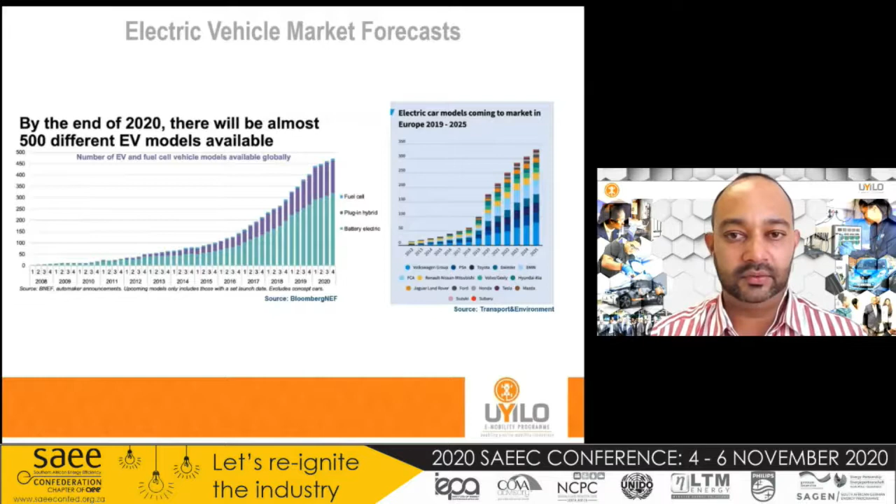What is important to note on the slide as well in terms of technologies, on the left-hand image, is that battery electric vehicles still maintain a larger portion of the market share, with plug-in hybrid vehicles coming into play second, and then a growth of fuel cell electric vehicles in that space. Transportation becoming electric is across all modes of transportation. All modes and options will be fully electric, from personal mobility to passenger mobility to motorsport, commercial vehicle applications, public transport, marine and aviation is moving to electric.

So as we see this moving with efficiencies and technologies, it's quite predominant that transport will become electrified. It'll be connected into the Internet of Everything. It'll be multimodal, bridging different modes of transportation. It'll become shared in terms of the new modes of operation of customers and experience. And the future will be autonomous, where vehicles will aim to drive themselves on different mobility platforms as well.

Now, looking at efficiencies, what's noted on the right-hand side, moving to the left, is that for the traditional conventional vehicle with an internal combustion engine, if we look at the generation of the energy itself and production of the fuel, if that's coupled to renewable energy, the fuel production efficiency is only 44%, and once utilized within the vehicle, it is only 13% efficient at the output of the wheels. Moving into the middle, unpacking hydrogen, the fuel production increases to about 52%. However, utilization in vehicles provides an efficiency of up to 22%, so still not ideal.

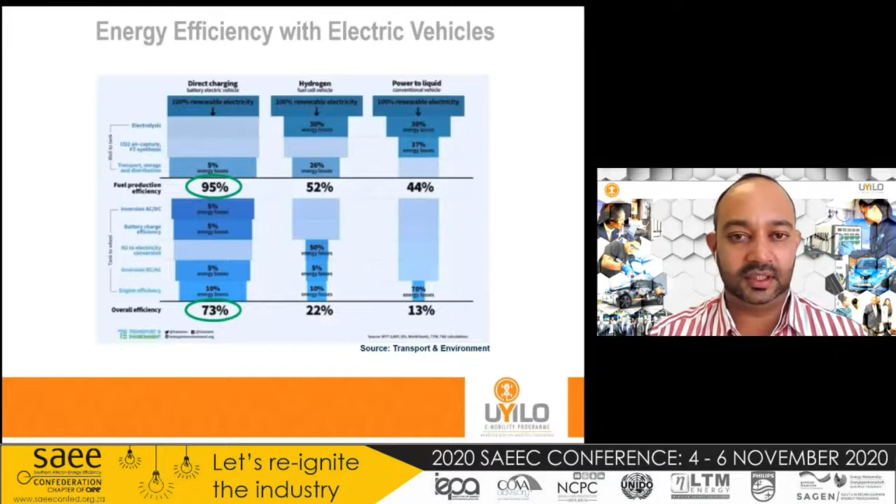So unpacking that further, what electric mobility has also brought about is not only an energy efficient vehicle as a mobility platform, but the whole value chain in terms of production is becoming efficient. They're looking at new material development for the vehicles, being sustainable and efficient, and also the method of producing these vehicles. The factories themselves are moving to renewable energy. The automation within the factories is also moving to smart systems and energy efficient systems, and optimization of efficiency as a whole from a production environment.

So with that, we see merging into Industry 4.0 and the Internet of Things, all in the space of energy efficiency and optimization. So it's not just the product; the whole value chain of production as well as material sourcing is moving to sustainability and energy efficiency. It's also looking at the end of life in terms of vehicle recycling, making sure that materials that go into the vehicles are sustainable and able to be recycled as best as possible.

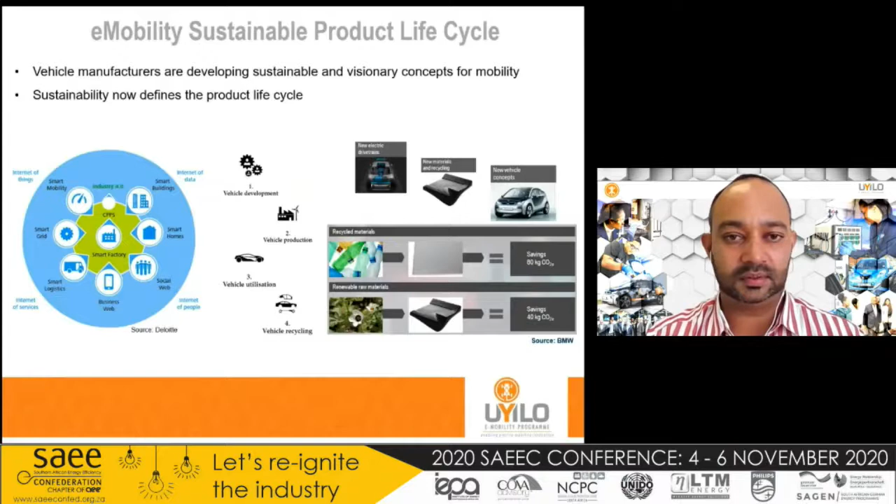So when we look at the life cycle of the vehicle, how efficient are they over the total vehicle life cycle? It's clear here, not only from utilizing the vehicle, but from the efficiencies these bring across. The example here is within the EU. The stats presented show that today's petrol and diesel cars emit almost 3 times more than the average EU electric car, taken in terms of the averages and countries presented there. So electric vehicles not only eradicate tailpipe emissions, but, dependent on specific countries with high renewable energy production, the overall total life cycle emission is a lot less.

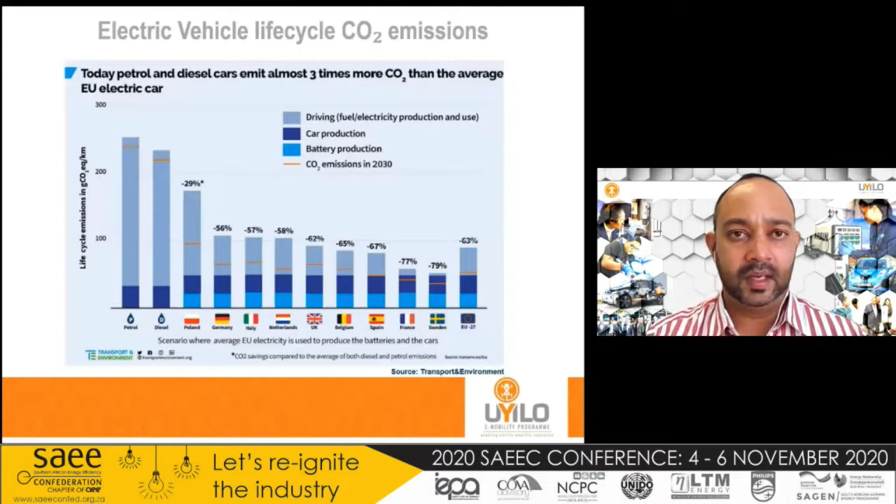From a user perspective, this is a snapshot of the maintenance of a traditional petrol vehicle versus an electric vehicle, both from Nissan. We've spoken about the efficiency of the vehicle, but this is some efficiency in your pocket as well. At the top is a typical maintenance cycle of a petrol vehicle, up to 150,000 kilometers. The R there means replaced, but in the South African context it actually means rands, because every time they replace all of those components, you're going to be billed for that in some format, either in a maintenance contract or built into the price itself.

And with that, we're seeing that on a petrol vehicle, there's quite a bit of maintenance involved over the life cycle of 150,000 kilometers. However, looking at the image at the bottom, we're seeing an electric vehicle is a lot more efficient from a maintenance perspective. The I that is highlighted there is just on inspection.

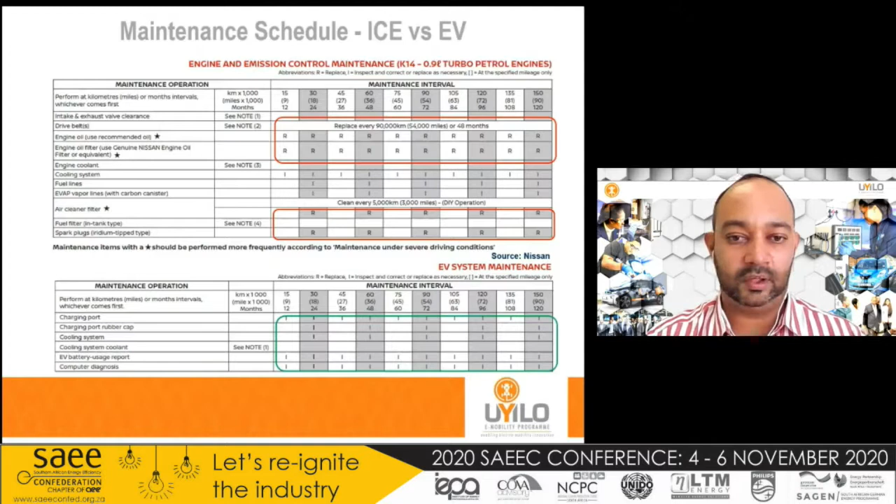So what this is highlighting is that over a usage distance of 150,000 kilometers, an electric vehicle would typically only go in for inspection and not have additional components to replace, thereby also providing efficiency in terms of your pocket on maintaining and utilizing an electric vehicle.

So moving on to the vehicle component itself, what we see is the main component highlighted there on the floor of the vehicle is the battery. That is the key component of the vehicle, where the majority of the technology is coming into play, but also a huge cost of the vehicle itself.

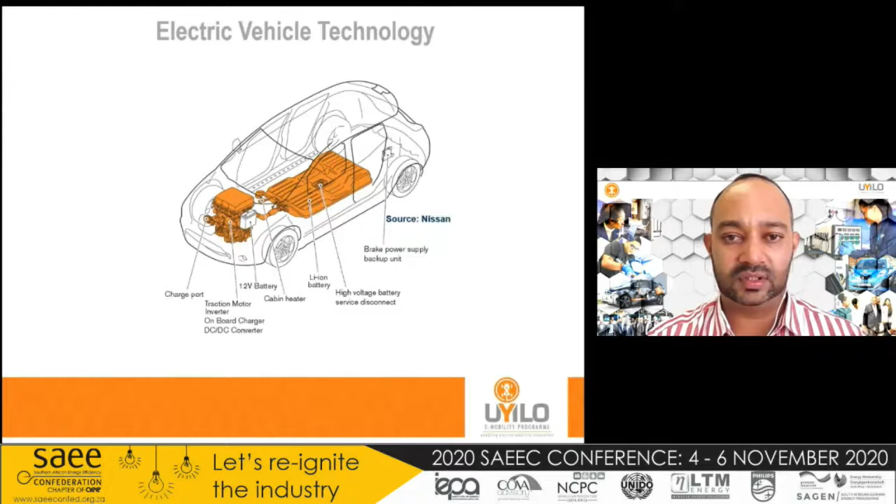Thankfully, the manufacturers offer up to 8 years warranty on the battery, and that gives some consumer protection and confidence in the vehicles themselves. The battery is also the largest component of the electric vehicle drivetrain system, and typically takes up most of the space on the floor of the electric vehicle itself.

Now, moving on to the technology of the battery, and that's what electric vehicles present. Within an electric vehicle, as highlighted earlier, a large component is the battery. Essentially, electric vehicles present a battery on wheels. And in the energy space, we're seeing energy storage play in the mix of renewable energy generation.

The energy demand is not always at the peak of energy production from renewables, and hence batteries or energy storage technologies come into play. So if we latch that onto electric vehicles, what we see is an opportunity to utilize electric vehicles beyond just mobility or transportation, utilizing lithium-ion batteries for grid services, behind-the-meter services, and those opportunities there.

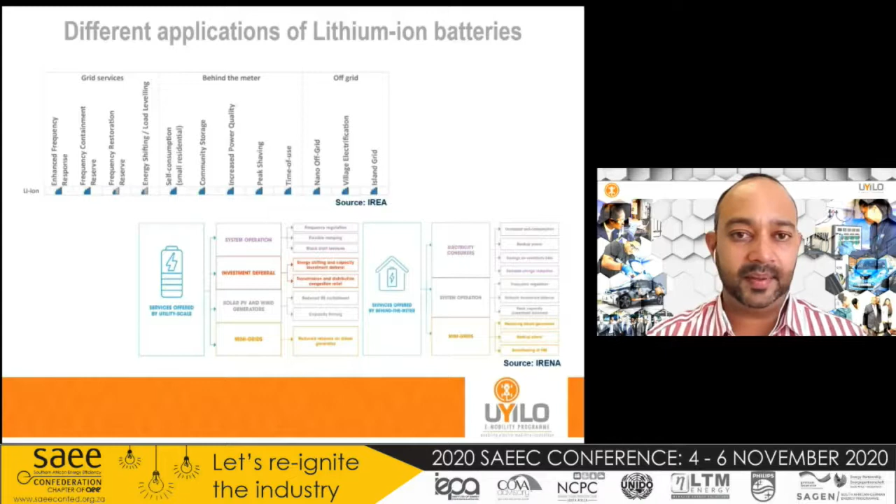So typically what we see in the slide is the landscape of how the energy sector utilizes batteries, specifically lithium-ion batteries. So if we unpack that going forward with the car, as an extension of the energy sector, we see the technology landscape evolving.

From traditional central generation, transmission and distribution, we're seeing an evolution of new technologies coming in, which are bringing efficiencies as well from a generation perspective. What's also key to note in this space is energy storage, playing from bulk generation into transmission, distribution, and end user as well.

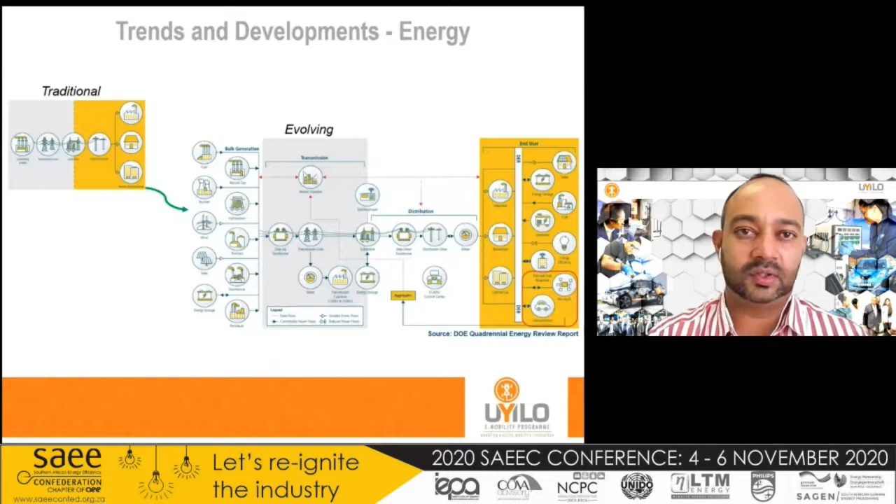And looking at the end user image, what's key to note on the right-hand side at the bottom, microgrids come into play, and also transportation. And on transportation, the image shows a bi-directional arrow, meaning that electric vehicles will not only charge from the grid, but be able to support the grid as well. And this is on the basis of expanding the aspect of the batteries within the vehicle.

So for the supporting infrastructure that allows that to happen, there's a range of different types of charging stations that get utilized at home, at work, and on the road. And what we also see is new technologies of charging stations coming on that have onboard storage.

So basically what it means is that when an electric vehicle is not being utilized on the charging station, the onboard energy storage system in the charger will actually charge up. And when a vehicle comes, it's able to deliver full power with minimal impact on the grid. So we're seeing supporting infrastructure available on public transport. We're seeing vehicle to grid come into play, where vehicles participate within the energy system while they're lying idle.

And what's also important to note in terms of energy efficiency and minimizing the impact on the grid is the implementation of resilient and smart grid infrastructure that supports renewables, supports storage on site, and minimizes the impact on the grid, while also optimizing energy efficiency.

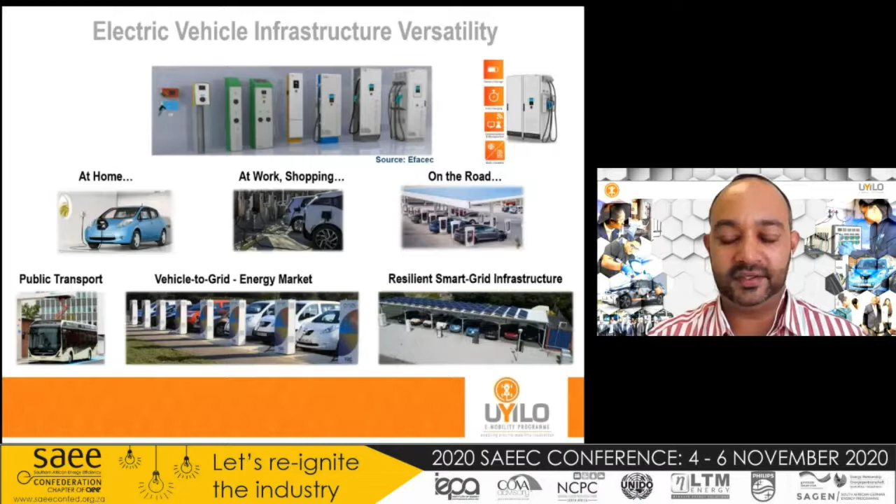And in South Africa's case, while the grid is carbon intensive from predominantly coal, these sorts of concepts provide energy efficiency on the grid edge side in terms of optimization and minimizing grid impact.

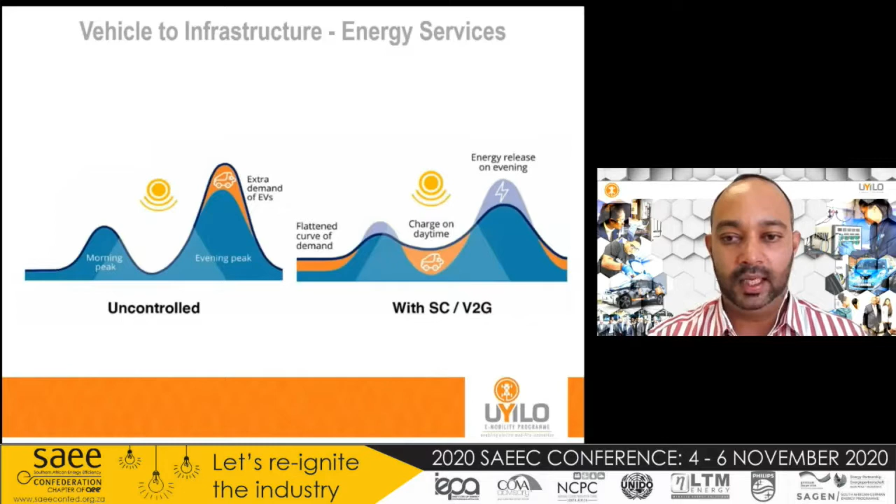So with the full integration of the system into the utilities such as Eskom and the municipalities, where they are generating their own energy, we then see that electric vehicles' demand on charging can actually be controlled and optimized to when there is capacity, and essentially flatten what was called the duck curve into a typical camelback curve, as the impact on the grid network, and also improving energy efficiency overall, optimizing both supply side and demand side management.

So on infrastructure services, what's called vehicle to everything. As mentioned, the electric vehicles have a large battery pack, and through that, utilizing the technology of the vehicle, the hardware of the charging infrastructure, as well as the software as the infrastructure, the vehicles themselves are able to deliver vehicle-to-grid services, typically looking at voltage regulation, frequency regulation, and other services as well.

In the context of energy efficiency, in homes that are energy efficient, typically with rooftop solar, we can then utilize that on energy production, and then on-site energy storage as well. And then also expanding that with electric vehicles that will increase the storage capacity. And typically that will form what's called vehicle to home, and typically behind the meter services, where the electric vehicle will supplement the storage technology and ability to minimize energy production and energy utilization in the home environment.

The technology utilization on V2X, or vehicle to everything, is being expanded into different technologies, not only DC technology, but also AC technology, and a number of manufacturers are also participating in this technology as well. While it was being pioneered by Renault, Nissan, and Mitsubishi, we're certainly seeing new OEMs and vehicle manufacturers coming into play into the technology itself.

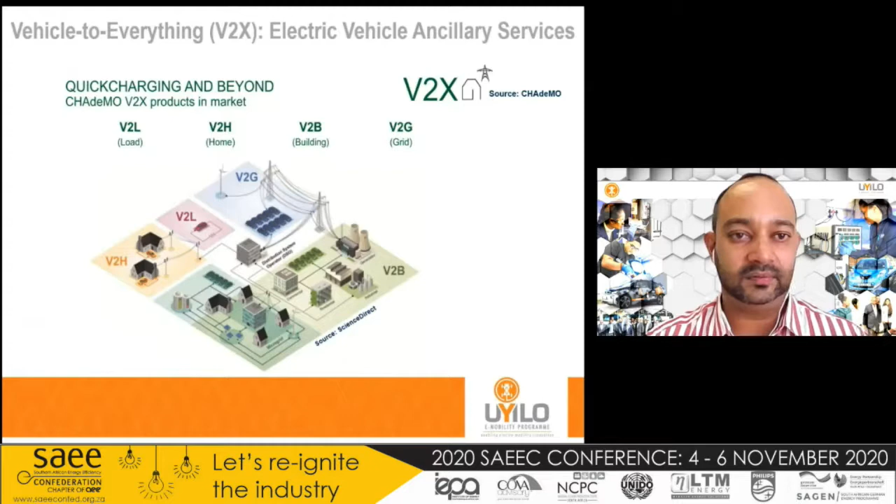And typically vehicle to load, in situations or circumstances where there's full power outages, in disasters or any other situations, the technology of V2L will allow power to be dispatched from the vehicle into a device that can provide typical 220 AC output and power typical loads for any type of emergency relief or support in that regard.

So if you look at vehicle-to projects worldwide, there's certainly a number of emerging and leading projects globally, specifically in the EU, in Europe, where a lot of the technology development and piloting is taking place. That's also led through the charging technology of CHAdeMO, which is on the Asian vehicles, but we're seeing that also come into play now from specific pilot projects from the European Association as well, and supporting technology.

And through that, one of the projects specifically highlighted is the uYilo project on the smart grid ecosystem for electric vehicles. And through that, we see the showcase in South Africa on energy efficiency and optimization, minimizing the grid impact of EV charging, optimizing renewable on-site generation, coupling storage, not only traditional storage but in the context of repurposed electric vehicle batteries onto stationary storage and integration within the circular economy.

And what we see is a large distribution of multiple charger network, AC charge points, DC charge points, the technology of vehicle to grid, as highlighted earlier, being showcased alongside Nissan, and then also energy management, localized energy management, optimizing energy generation, monitoring the grid on what its capacity is, and also optimizing the demand side from the chargers as well.

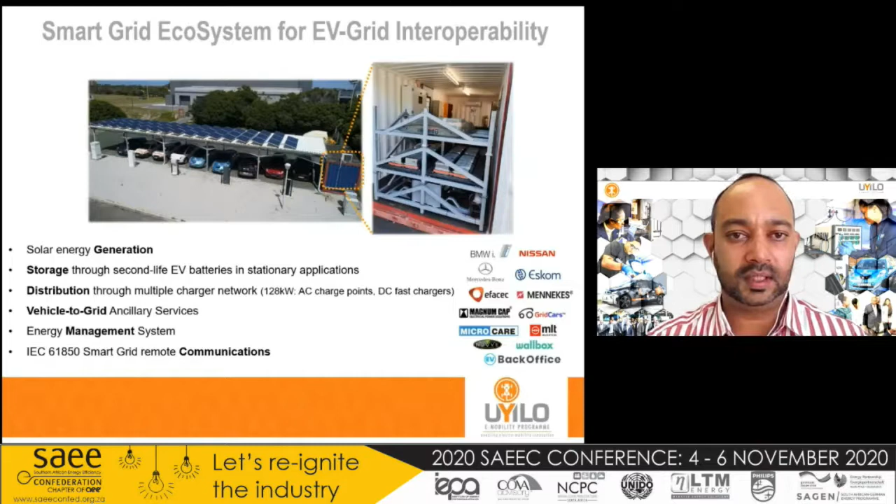And then on the overall smart grid communications, the project has alignment to IEC 61850 for remote smart grid communications of the microgrid itself. So what we see is that there's local demonstration of these technologies in South Africa to advance the rollout and support all role players in the ecosystem as such.

So wrapping up from uYilo's side, as mentioned, the program has been in existence for the last 7 years, alongside a mandate of enabling, facilitating, and mobilizing electric mobility. The program is supported through the Technology Innovation Agency and funded through the agency as well. The activities of the program include government lobbying, industry cohesion, enterprise development, pilot projects, thought leadership, and skills development.

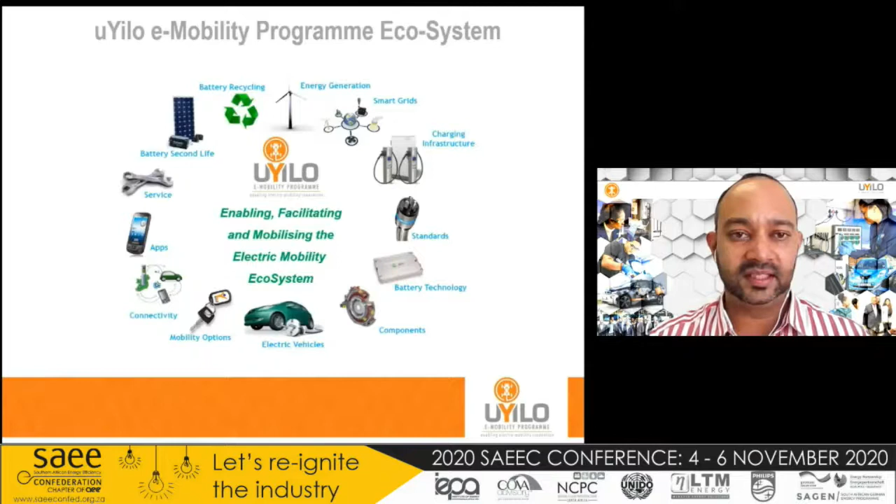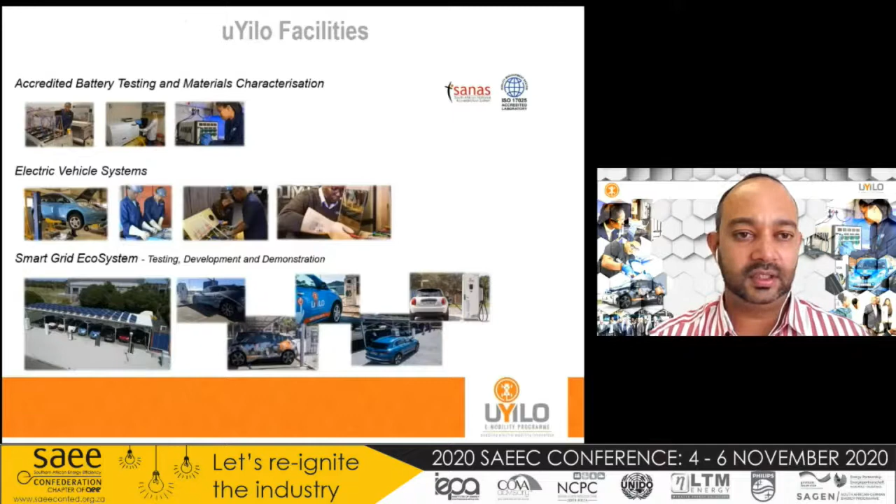The program is supported across the ecosystem of electric mobility as we see that it presents. So it's not only about the vehicles, it's unpacking the whole ecosystem in South Africa, looking at new technology developments, supporting mobility options, skills development, and also unpacking the circular economy, and is supporting facilities as well on enterprise development support, on technologies and emerging participation of the industry as well.

On Kickstart funding, that's what we initiate to advance industries in South Africa to participate in that, and that's an annual funding call that's available to advance technologies across the ecosystem for electric mobility, and also advance South Africa's participation not only in the local economy, but also opportunity in long-term outlook to expand and participate in the global economy and technology that electric vehicles present.

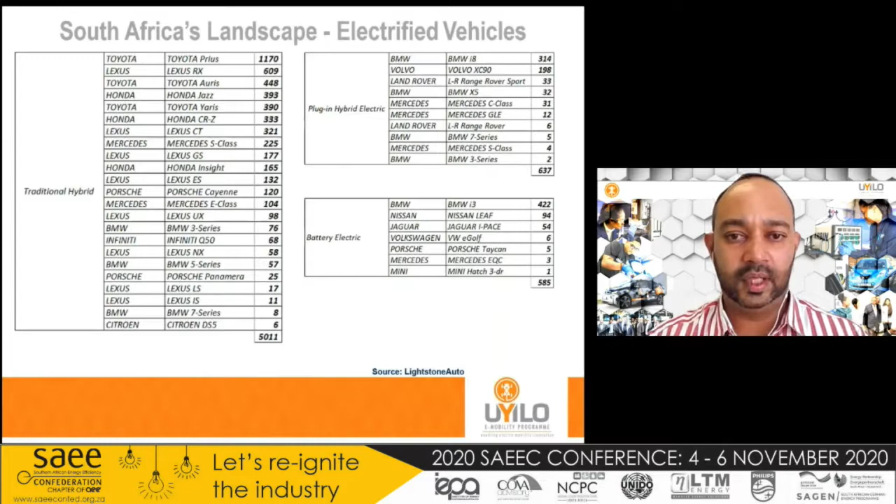So finishing up on South Africa, where are we? So hybrid vehicles were introduced in 2005. So it's still early days for electric mobility, but certainly we see an uptake coming into play, and various lobbying work that is in play to try and assist the uptake from a pricing point of view, from a taxation point of view, and trying to increase the uptake of electric vehicles.

Supporting charging infrastructure is growing radically across the country. A number of role players have been advancing that, and we're seeing that not only within the urban and the city environments, but we're also starting to see the network develop on the highway networks as well. And as alluded in introduction, it's not only your personal mobility. All modes of electric vehicles are being showcased in South Africa in mining, on commercial vehicle applications, electric motorcycles, as well as tourism and utility vehicles.

So we certainly see South Africa is emerging in this space. A lot more commitment and implementation is required, both from government and industry. And we hope that this has certainly brought some insights to the delegates of the conference, and we look forward to further advancements and uptake of the technology itself. So thank you for your attention, and hope that that has brought some insights and opportunity to engage further in the later panel discussion. Thank you.

Okay, sorry guys, this online thing, it's complex, it's not for everyone. So I'd like to apologize for that. I had my mic on mute.

Yeah, so to start again, thank you, Mr. Parmar, for that highly informative presentation, on giving us an update on some of the efficiencies, some of the technology, and the state of where South Africa is sitting or standing in the global context and in the local context when it comes to e-mobility. I think a lot of people have learned a lot from what you presented. For myself, and judging by some of the questions that we are getting in today, a lot of people are really excited about where South Africa sits in the e-mobility and the future and the potential that the future holds.

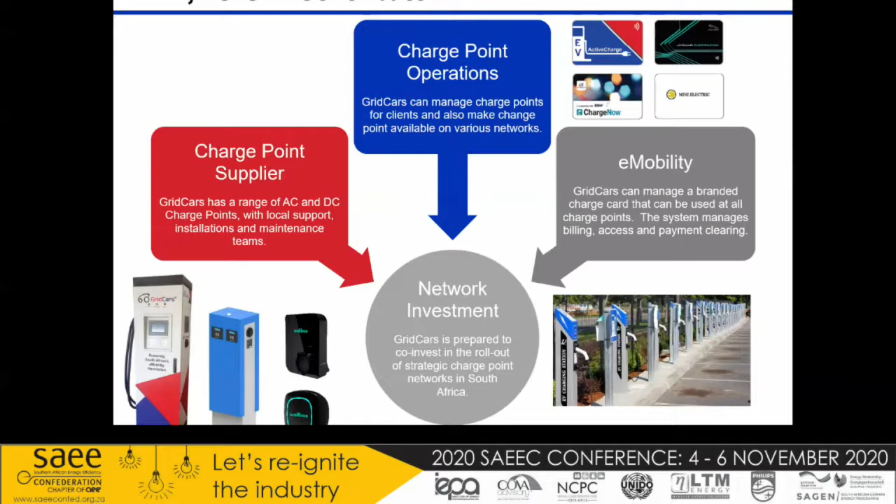So just as a very brief introduction to what GridCars is, we play in 4 functional spaces. So firstly, we're a charge point supplier. So we've got a range of charging stations that we would be able to sell or supply customers. We are an operator, so we manage charging stations on behalf of other customers. And we're an e-mobility provider.

An e-mobility provider means that we're really managing the back end of the charging station. So the back office, the payment systems and the billing systems. And then finally, we also invest in the network and help to grow that network so we can move that across South Africa.

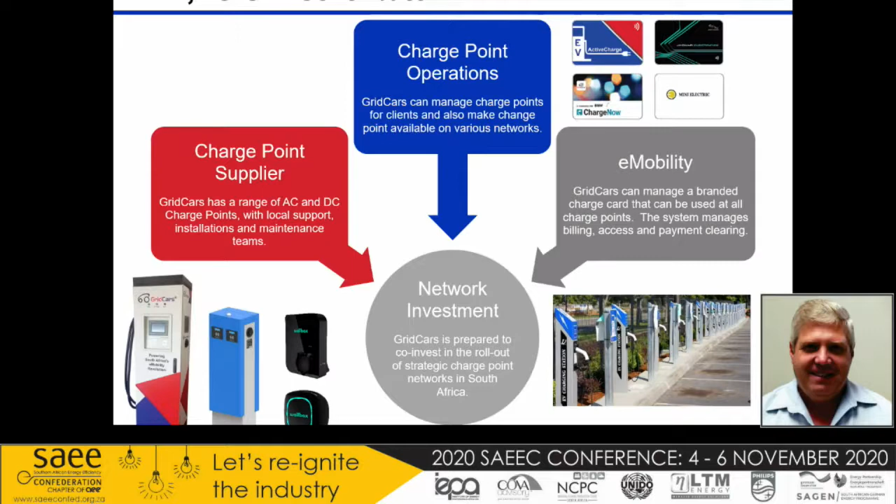Why is the EV market growing? I think Hiten has given us some really great insights into where the market is and to what the world players are, etc. So these 4 major drivers. Firstly, stricter emissions regulations, and I think customer awareness of these regulations and certainly of the emissions side of things. Customer acceptance is really a big one. We're starting to see more and more people realizing where the technology is going and what's going to happen and when, and how quickly it will pivot.

Lowering of battery costs, that's a massive one in the market, and the installation of more charging stations as we expand that network. I think we're seeing the evolution of multiple business models in South Africa. We're seeing large players entering the market, so more and more of the fuel companies are putting strategies on the ground. Most of the OEMs have now got a strategy, if not vehicles in the country. We're seeing early signs of consolidation of technology. We're seeing venture capital and private equity funds starting to underpin the growth. And these are all the signs that you need to see a strong move towards the pivot within this industry.

So there's also strong support from international and to some extent local levels in terms of decarbonisation. We're seeing a drop in price of renewable energy and lowering operational costs of EVs, and specifically international affordability of EVs and the increase in supply. And why do I say specifically international? EVs are still relatively expensive in South Africa, but as the prices drop internationally and as production internationally slows down, there will be a forced move to electric in South Africa, and we will need to manage that transition. So this is the motivation as to why we think it's all going to happen quite quickly.

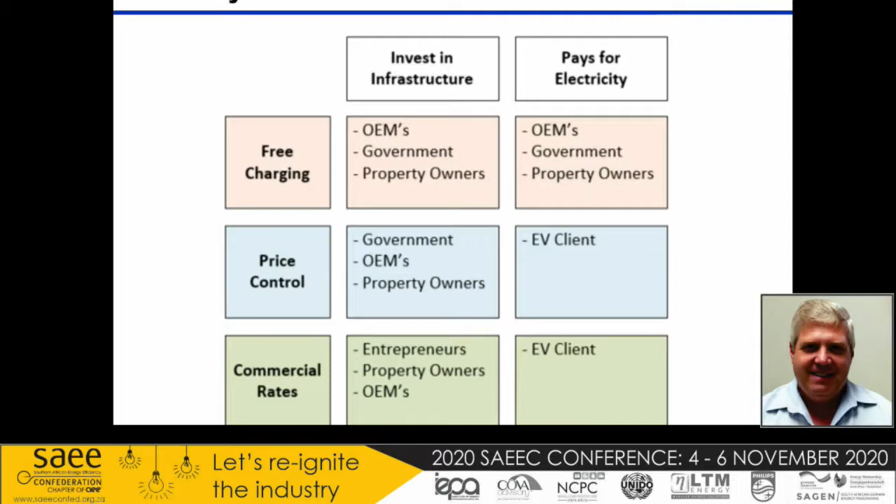So part of the discussions that we've seen happening around various tables is who's going to pay for the infrastructure. So there's 3 ways that ultimately this will play out in South Africa. It's different in other countries. In other countries, we've seen a much stronger role played by government. So if charging was free, the only people who are going to fund that are going to be the OEMs and government themselves. And they'll be paying for everything because there isn't such a thing as free. So if you're driving an electric car, it uses electricity, and somebody's going to have to pay for that electricity. So a free charging strategy would mean the payment must come through the OEMs, the government, and maybe to some extent property owners.

If we look at a price-controlled environment, then again, the infrastructure funding would most likely need to come from government and OEMs, simply because there'd be very limited business cases. There wouldn't be the opportunity for entrepreneurs to enter the space. And certainly price control would mean that the EV customer is paying for the charge.

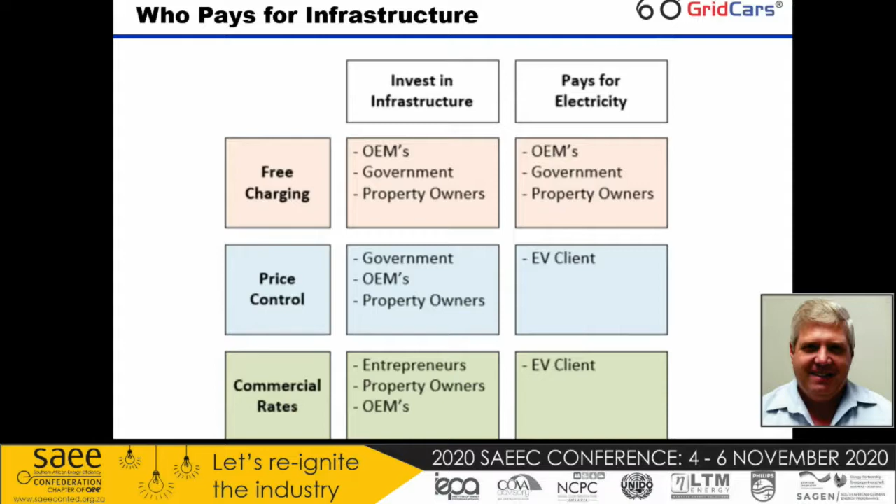Finally, if we allow the industry to be driven by commercial rates, so supply and demand. Basically, as new players enter the market, there'll be a play in terms of price, and we'll see those things changing over time. Certainly there, you're looking at infrastructure funding through entrepreneurship, property owners, OEMs, and various other opportunities and business models that come up. So just to then run into how do these things start coming together?

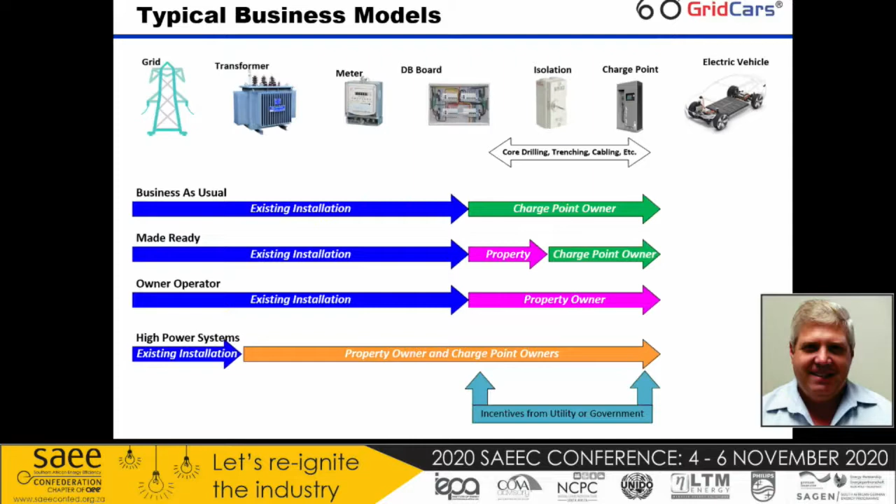When we move to high-power systems, this line starts to move back towards the transformers. And just to give you an idea, if you've got a 200 kilowatt transformer and I want to install a 360 kilowatt charging station, we've got a problem. So we need to then look at upgrading those networks. As we look at constraints within these networks, because this is really where the challenges come in infrastructure.

So the first level of constraint, we typically try and deal with that through what we would call smart charging or load management. Really, it's similar to what Eskom's load shedding is. So we'll share the load between various vehicles or various charging stations, potentially between various properties. And we'll manage that load in a clever way. So if we know certain cars need to be charged quicker, we'll give them some level of priority.

So if we move into the second part of stress management, we start looking at having a battery boost. So battery systems that then boost the charging infrastructure so that we can slowly build up the charge in the batteries and then unload it when we need to actually charge the vehicle.

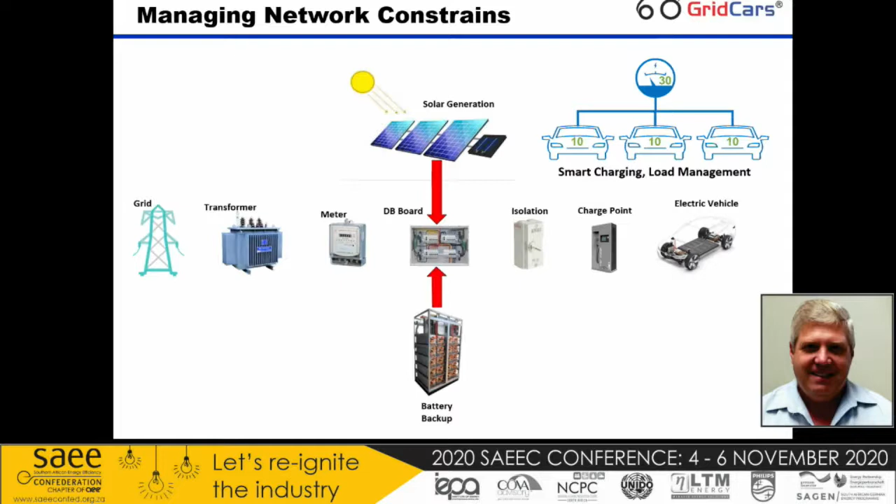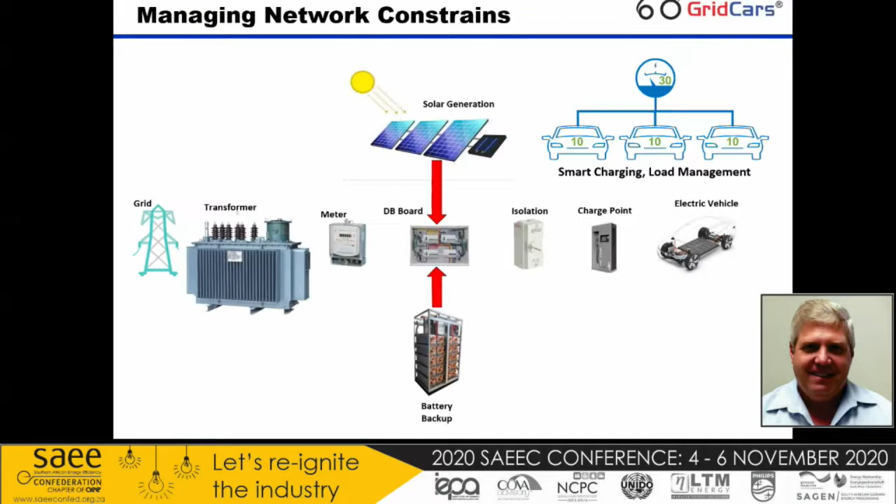The next level is we move the battery system to a battery backup at the site, and we'll probably start looking at introducing things like solar and allowing that site to be a little bit more independent and to be able to expand beyond the normal capabilities of what their site is capable of doing. Beyond that, it's really making transformers bigger. So, we want to try and avoid that because that becomes a very costly exercise.

Another example, we've worked with Clearwater Mall. You can see a small picture in the top right of it, but this just gives you some sort of idea again of how much contribution something like solar could make and how we could utilize that contribution going forward in solar systems and charging systems.

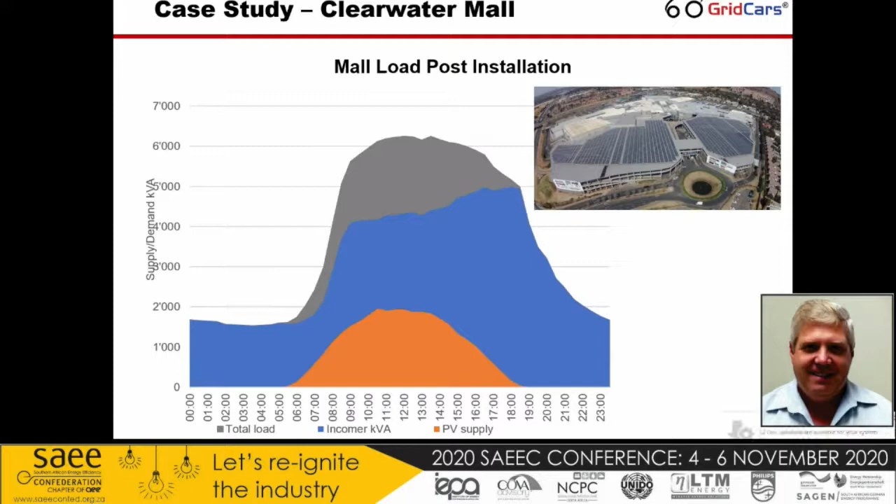Grid Cars was faced with, every single charging station supporting two standards means extra money. And if I look at the network we rolled out, we probably rolled out 5 or 6 extra connections simply because of the fact that we weren't supporting a second plug standard.

So South Africa is lucky in the sense that we are a new car country only. We don't import second-hand vehicles. And because we don't import second-hand vehicles, we don't typically have to deal with legacy things. So Nissan, for example, typically brought out CHAdeMO initially, whereas now they are making it an offer that you could either bring the vehicle as a CCS or CHAdeMO. Clearly, at that point, you need to be buying a new vehicle, not importing second-hand vehicles. So I think as a country, it's really worked for us to stick to one standard, and Grid Cars has supported CCS across the board and across the network.

So just to then take you into what this operating environment looks like that we've already established here in South Africa. And I think it's really important to understand when we talk about infrastructure, yes, there's the energy side of it, there's the charging side of it, but there's a massive big virtual component to it. And Gridcars has partnered with IntDev, Catalytic, and with Internet Solutions to set up a massively redundant system where we have some data center redundancy, we have line redundancy. So it gives us exceptionally high uptimes of any of the equipment that we're running in these networks and able to support that network.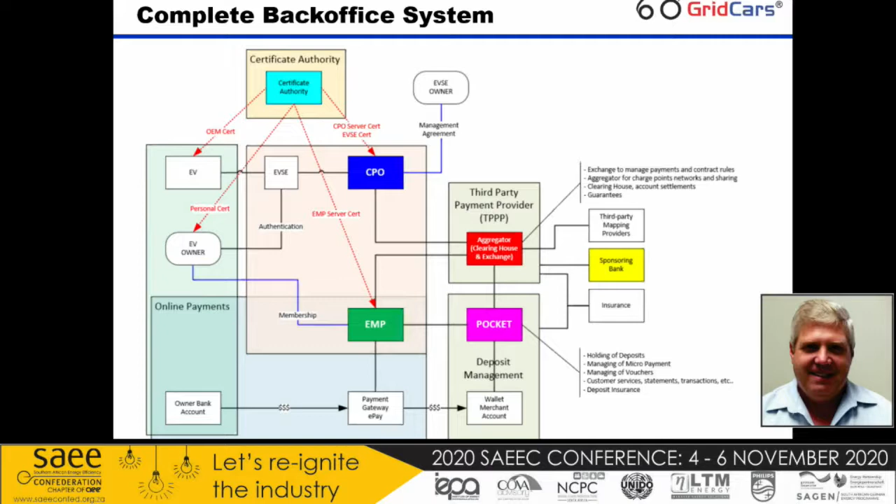So as we move forward, how do we activate a charging station? If you arrive at a charging station and you want to be able to pay, it's really important that we try to keep this as simple as possible. If we allow the industry to move in a direction where we have 20 different payment systems, this is going to be a real challenge. So what we've done is to look and say, how do we drive a single payment strategy? And that strategy right now is RFID.

But on top of that, if you don't have an RFID, you can start it with the app. There's an app that you get that allows you to start transactions, look at your transaction, see how much it's costing you, etc. You can also start it using a QR code or a WhatsApp message. So we've tried to integrate the single payment platform into various points of initiating those charging sessions. And finally, if you've lost everything, you've lost your phone, you've lost your card, well, maybe not lost your phone, then you can call into the call center and somebody will help you start that charging station remotely. So we're fully capable of providing multiple layers that allow the technology to work.

If we look at the value chain within this industry, what this drawing tries to do is just give you some idea of where the profit margins lie, or at least the profitable portions of this industry. So firstly, you'll see the green haze around some of the blocks. Obviously, financial services, banks, if they are funding something, they're making a profit out of it. Hardware sales is profitable. Installation and maintenance is profitable in the industry. Energy distribution, energy generation, all of those things are profitable in the industry.

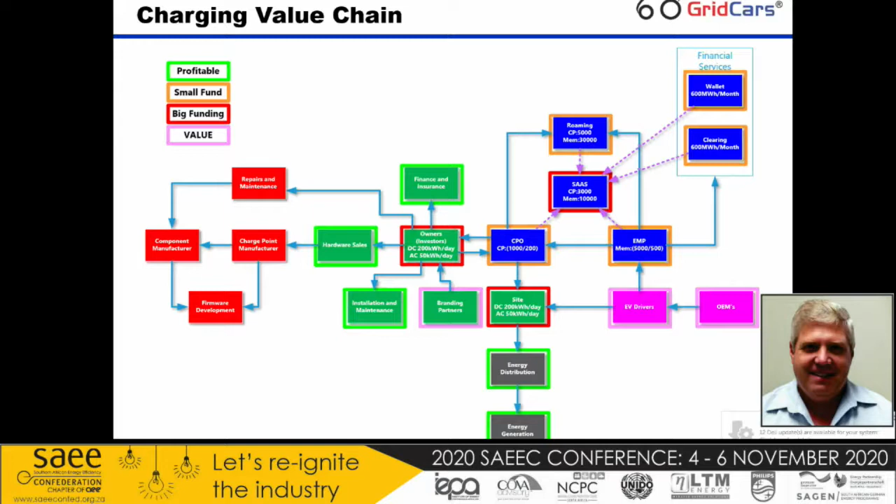But if we don't have those, we don't have a managed system, and we don't have something that we can grow from and that we can build. So GridCars has taken the initiative of establishing these systems and getting everything in place in such a way that we really are able to deal with that.

So what does the network that we keep talking about look like in South Africa? To give you some basic things, the first question that we're typically going to be asked is, what does it cost? It's a difficult question. And the reason why, let me show you what's happening in the UK. This drawing basically shows, on the left-hand side, the markup on electricity. So one would be 1 times the cost of electricity. So if electricity was £1, it would be £2.

And looking at where those numbers rank, the average in the UK right now is around about 3.3. So 3.3 times the cost of electricity is the funding cost needed to sell electricity in order to make the investment in infrastructure worthwhile. However, we're much, much closer to the 5 to 10% on the horizontal scale in terms of actual position. So even the 3.3 is not at a break-even point.

If you just take a look at the big black line, that one is showing you the profitable point. So in terms of annual compound growth of energy use, we need to be up at 15 to 20% before we cross over that profitability point, even in the UK and areas like that. In South Africa, we're certainly a lot lower than that.

But importantly, we've positioned the pricing because there is not a huge market. So we've had to position this very much on our own as GridCars, and we've positioned that at 2.5 times the cost of electricity as a starting point. Beyond that, we would see how the markets develop, how other players entering the market would price their things. Some people will price above that, others below that. And that will allow the market dynamic to move around and allow a fair deal for the customers that are working in the space.

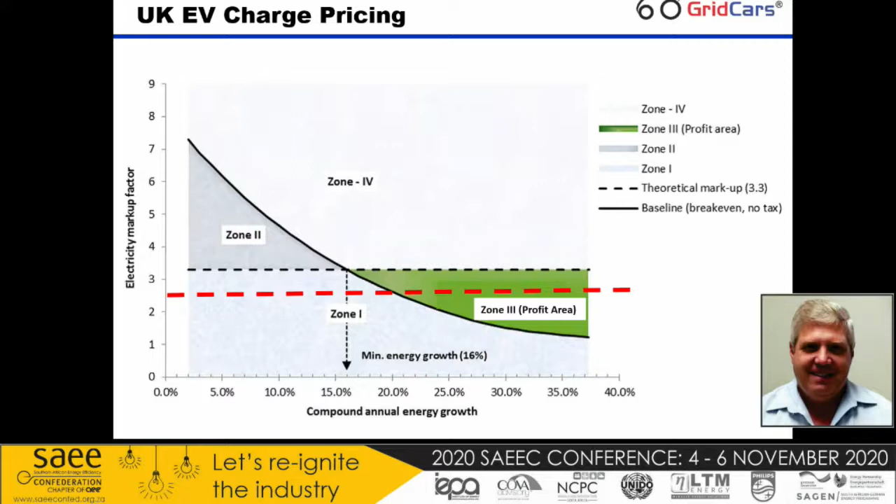So what are the real numbers for South Africa? Well, if you look at a fossil fuel vehicle, I might be out on the fossil fuel price per litre because I don't buy petrol anymore, so I'd have to look it up. But we're looking at fossil fuel roughly about R1.50 per kilometre. If you look at public charging in South Africa, so charging on the GridCars network or any other paid network, whether it be Jaguar or any other, around about R1 a kilometre. So that would make it 30% cheaper than driving on fossil fuel.

If you were charging on your home charging system, so just paying the municipality's cost, you should be down at about 37 cents a kilometre, which is maybe a fifth of the cost of fossil fuel. And of course, if you move to solar, the solar business case really makes a lot of sense for electric vehicles. And that can take you down as low as 17 cents.

So we talk about what we call blended rates, and for us that is that about 20% of charging would happen in public. There are worldwide stats that talk about 10 to 15%, so it could be as low as that. But we've worked on a rate of 20 for this example. So if 20% of your charging is done in the public space, you're looking at about 44 cents a kilometre. So less than a third of the cost of fossil fuel.

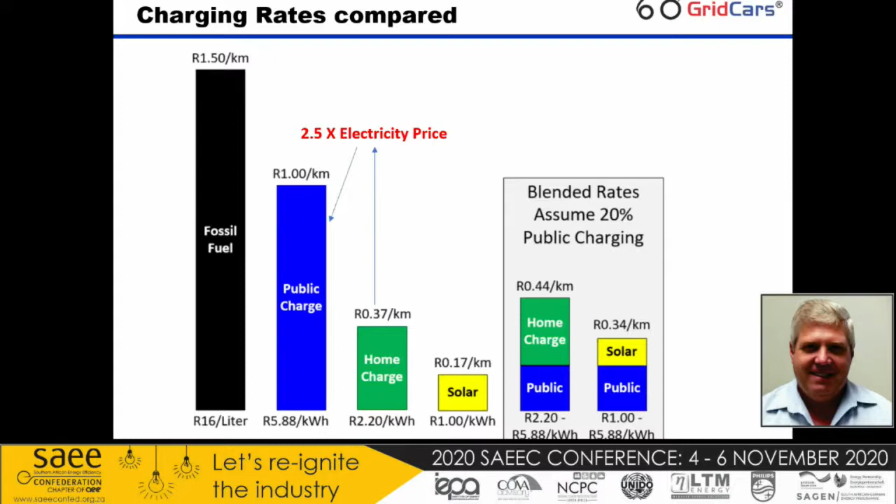And if you bring in your home charging as solar charging, then you're looking at about 34 cents on a blended rate. So these all show you very clearly that it is absolutely cheaper to be driving on electricity than on fossil fuel. Of course, it depends on the size of your car, and there are some variations around that. But this gives you some idea of where the pricing strategy is going to go in South Africa specifically.

We looked at 2 scenarios to try and get an understanding of whether it's worth investing in the infrastructure now and trying to understand where do we take South Africa. The first thing, the idea was to say, what will happen by 2035? So roughly about 15 years from now. So the idea was in 2035, we need to look at 2 scenarios.

Scenario 1 is that we stop selling fossil fuels by 2040. Scenario 2 is we stop selling fossil fuels by 2050. So this gives you some sort of indication of where we're going. 2040, personally, I think is actually wrong. Some of the most optimistic projections that are coming out are saying we should be stopping selling fossil fuels by 2026. That's only 6 years away.

And this is looking at rapid pivots. It's looking at things like the Osborne effect and how that's going to change the way that spending and the way that these things will grow. So let's be conservative and say it's 2040 that we're looking at. If 2040 is our stop selling fossil fuel date, then what happens at 2035?

Firstly, we would have to have a fleet of about 2.8 million electric vehicles already by that time. We would also need total fuel cars of about 5.2, because remember, they're not just going to disappear, they'll diminish slowly. We would have invested about 7.6 billion Rand in chargers. So the current investment happening in charging infrastructure is really low compared to that.

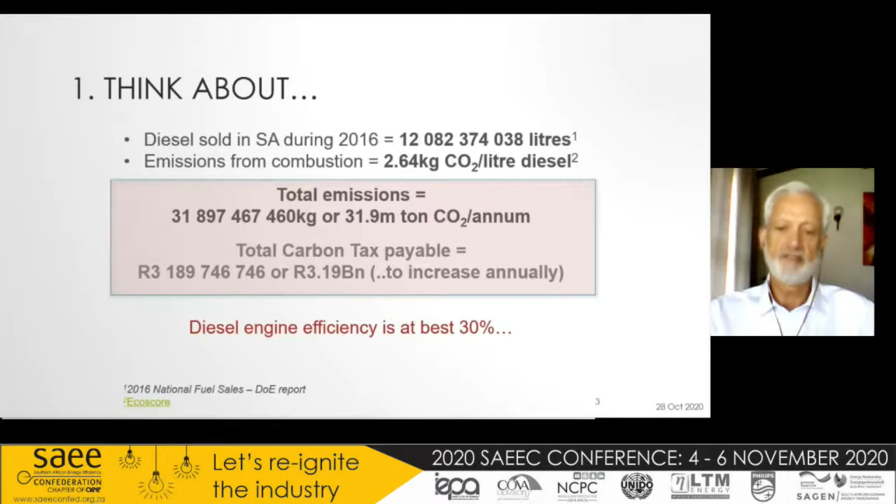It certainly is not a fair comparison because not all of it would be applicable, but it certainly gives you an idea. The reason is diesel engines are at best 30% efficient, and that's the stuff we use on our roads. You see it everywhere in vehicles and in trucks and other types of transport.

I'll touch on that. The focus of this presentation is based on research that was done for the Chamber of Mines, and it looked at all the transport options, the feasibility and application of each option at various distances, the evaluation matrix, any other innovative technologies that need to be investigated, and I'll touch on that as well. So certainly an interesting environment.

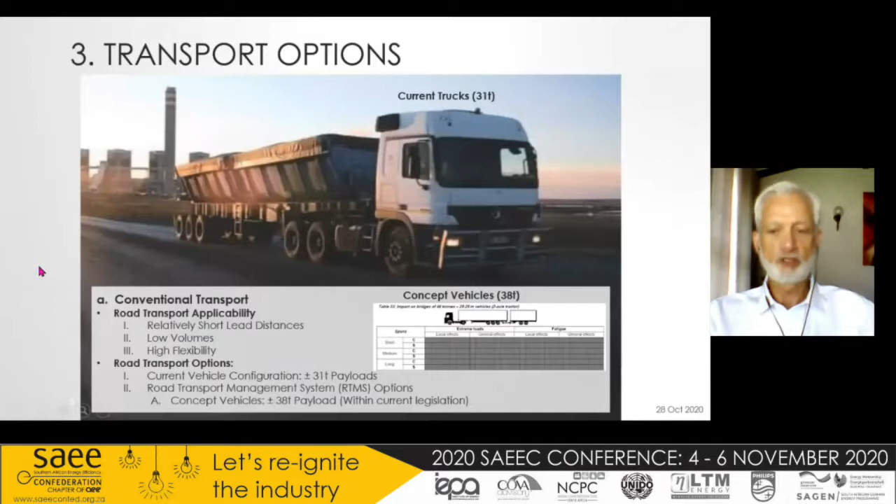I'm not going to go in detail here, we know most of this, but this is the various types of transport, and this is the one that's usually being used in South Africa at the moment. Normal diesel trucks with huge cargo loads, and certainly there's innovation in that space as well with concept vehicles and the like. But these are not the focus of the presentation, but it needs to be taken note of.

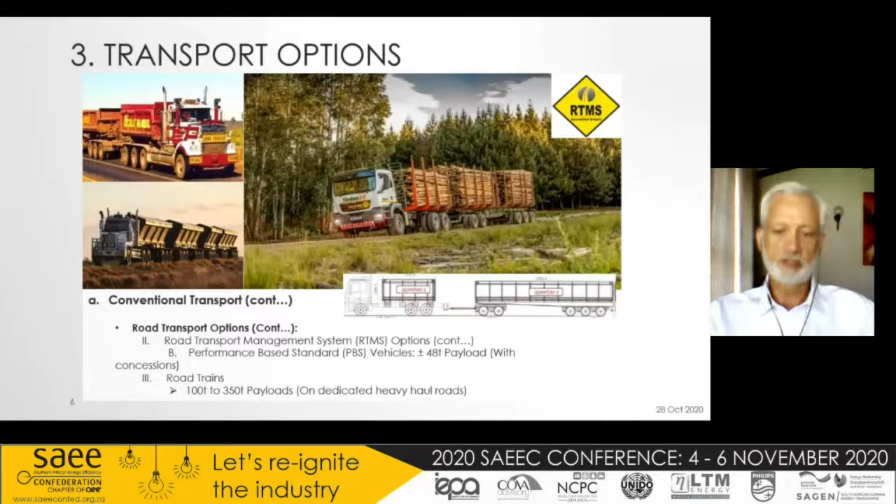Other transport modes, as for the systems being used in the rolling industry, as well as road trains in the Northern Cape areas, and certainly there's developments there as well, but the RTMS system is one of them. Certainly it's an area to note as well. In the normal conventional rail methods, that's Transnet and the likes, there's various types of freight there as well. Often many of these railway lines are electric driven, which is good, but many of them are still driven with diesel locomotives.

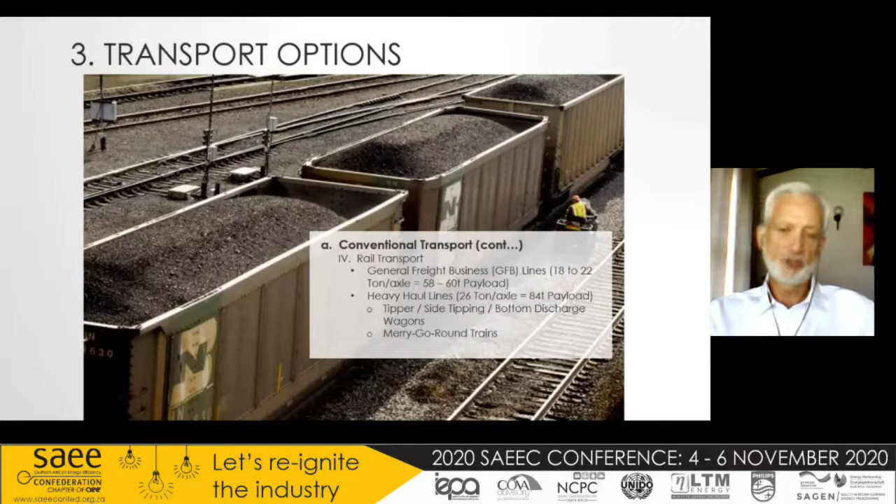There's transport options, some of them innovative and being investigated, and some already in use, such as the maglev systems, the experimental maglev systems. These systems are far advanced, because the maglev system for rail purposes, transporting personnel or people, is operational in Shanghai.

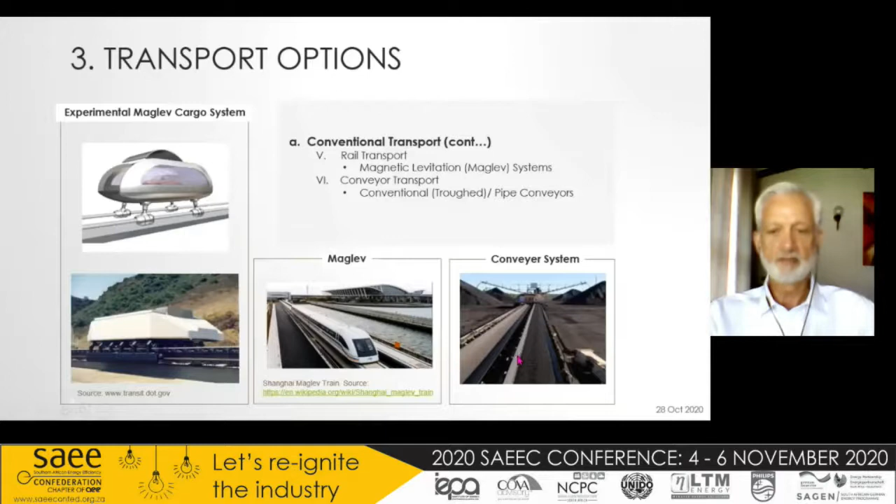And then normal conveyor systems and pipe conveyors. This is a troughed conveyor; a pipe conveyor is where you form a pipe with the conveyor itself. That's an option as well, we know this one well. Then another transport option is we transport the product in a slurry form, we crush it and we mix it with water or something else, and we pump it along a pipe or something similar.

The other transport option is product logs, where you press the product into logs and you push it into a pipe, and then you drive it on in that pipe. It could be with water, it usually is in this instance, if the product won't dissolve in the water, or you can push it into a pneumatic capsule or liquid capsule. This one is well known and already being used in water. These are brand new. This is the picture from Elon Musk's website.

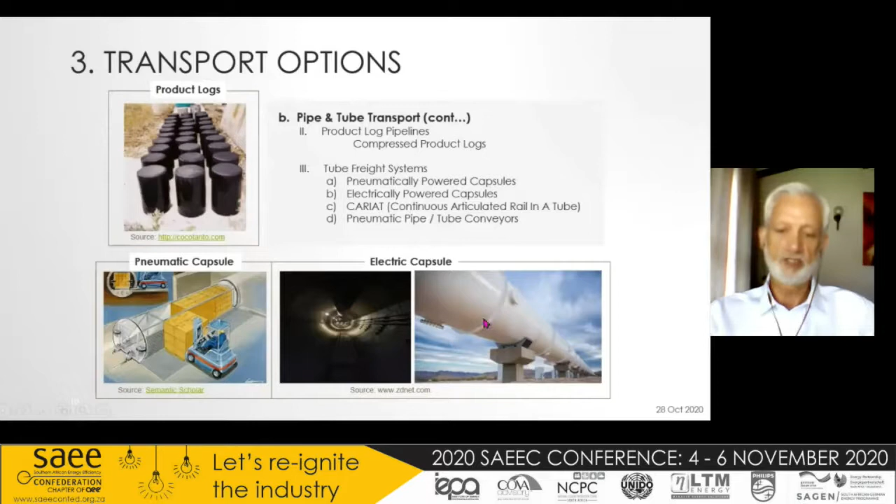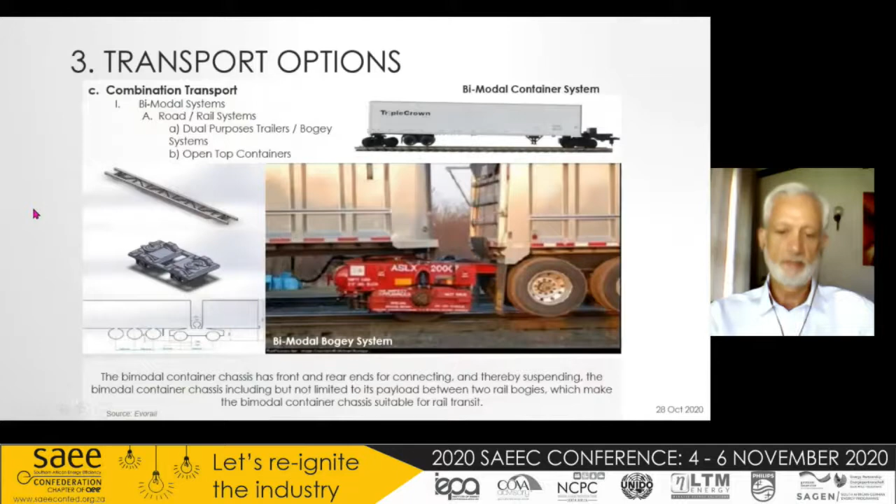Other transport options are bimodal systems or combination systems. This is where you use the container, don't even remove the wheels, you just load it on the rail using a technology like this. In these cases, the container could be open at the top or closed at the top. Take note of this one. It's an important picture, and I'll touch on this quite often during the next few slides.

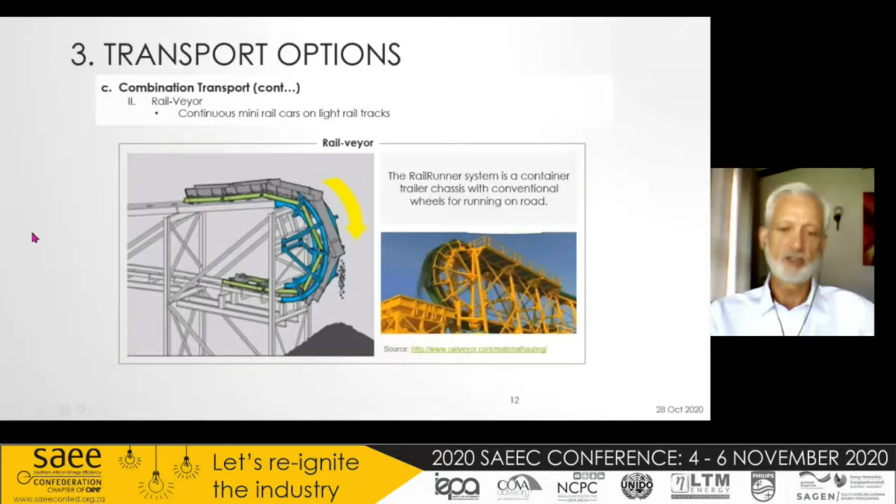This transport option is a combination of a rail system and a conveyor system, tried and tested, lots of them installed where required, and certainly quite easy to understand how it works. But take note, it's similar to a conveyor system, but it's really carts on the track. Also a well-known system, these are transport systems that could be classified as ancient, because many of these types of railway systems exist since the late 1800s and early 1900s.

The aerial ropeways and also the rope conveyor systems. These are usually used in forest areas or valleys and mountainous areas, and ropeway systems are being used in Barberton still. And we've got South African suppliers for all of these.

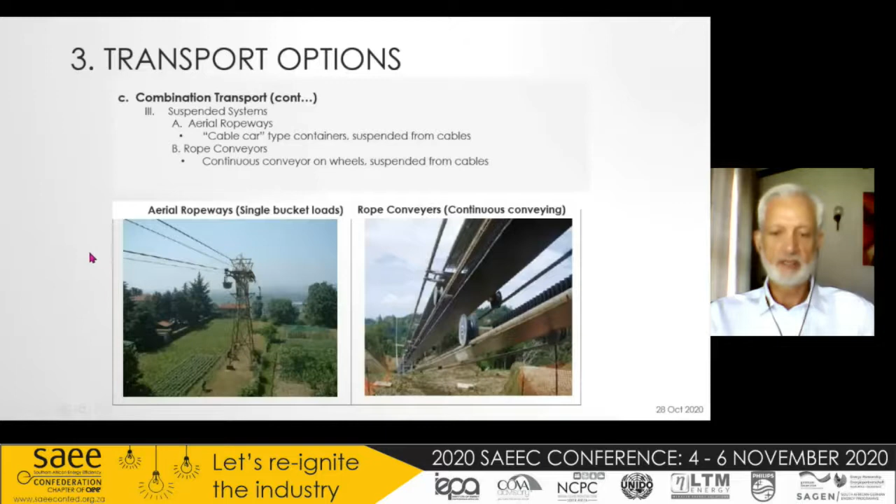Innovative transportation concepts are currently being driven, and green hydrogen is probably the most important one. Green hydrogen is where you generate hydrogen from green energy like PV and wind, and we've got a huge amount of solar in this country, so this is an area where South Africa is seriously doing some research.

There's also a possibility of using platinum cathodes and electrodes to generate hydrogen, and therefore platinum is also being used. It would be hugely beneficial for South Africa, and there's lots of interest in this space.

Then there's also work being done on autonomous vehicles, self-driving electric buses. I don't know if that will work in South Africa. I think so, but there certainly might not be the appetite considering the amount of joblessness in the country.

And then there's work being done on conversion kits, but more work is required specifically in South Africa, because why throw away an old vehicle? When the engine seizes or something happens, why can't we convert it to an electric vehicle or a hydrogen vehicle? We need to start getting these things allowed.

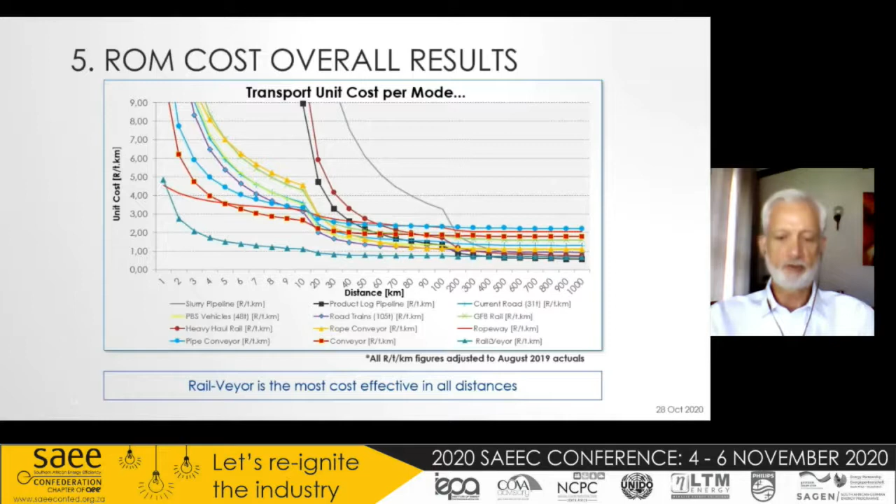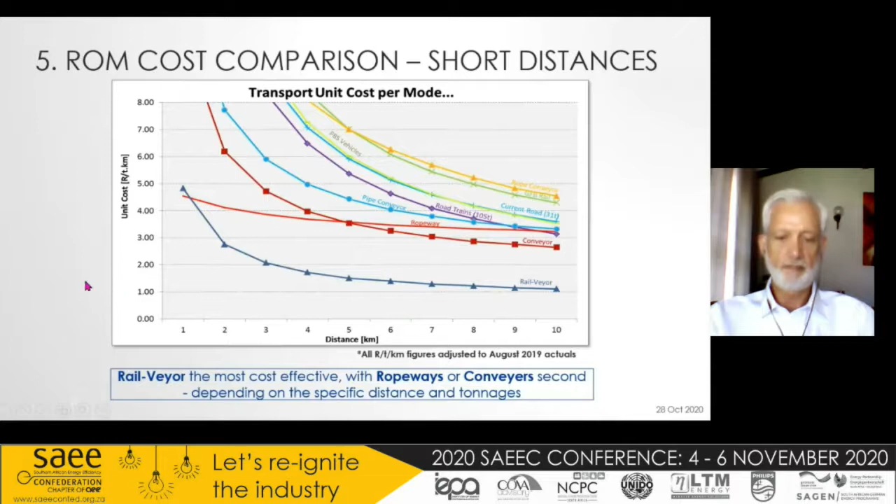For shorter distance, looking at the first distance, unit cost per mode, 1 kilometer to 10 kilometers. This shows you the various graphs, and the Rail-Veyor system, as I've mentioned, is the most cost-effective, with ropeways or normal conveyors coming in very close, and then road trains also fitting in there, depending on the specific distance and the tonnages involved.

Looking at the distance between 20 kilometers and 200 kilometers, you can see the Rail-Veyor is still there, but now road trains and pipelines and conveyors come in as well, quite competitively. So certainly, depending on the distances and the tonnages, you need to consider these technologies that are most cost effective.

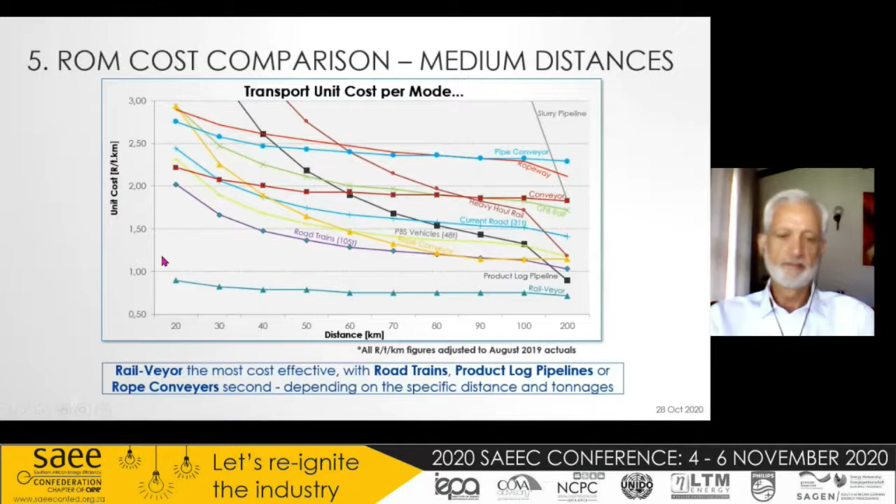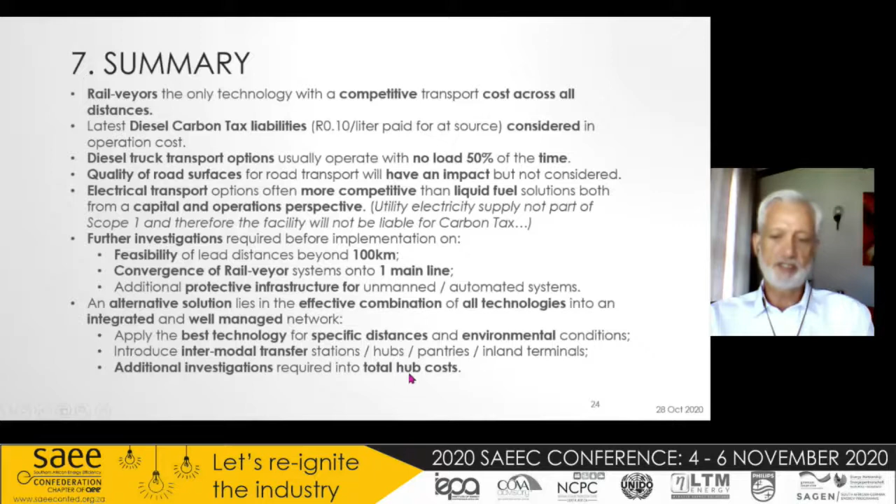You will need to investigate protective infrastructure systems for unmanned and automated systems. So many of these systems can be unmanned and automated. Then alternative solutions lie in the effective combination of all technologies, integrated and well managed in a network. Apply the best technology for specific distances and environmental conditions. We don't have a choice anymore, we need to do this now. Introduce intermodal transfer stations, hubs, and inland terminals where necessary. Additional investigation is required in total hub cost. The cost of these hubs and stations is not included in this presentation.

In conclusion, freight and raw materials transportation combined use more fuels than passenger vehicles, especially now with most people working from home. New options are being developed continuously, especially in the exciting area of green hydrogen. Many of these options are more efficient, tried, tested, and they already exist. The uptake of the most suitable transportation options should be promoted.

Promoting technology change with factual research findings, that's the easiest way to do these things, and that's why I present this. Users should consider the most efficient transport option. Not just take a truck, that's usually what happens. I'm in the transport business, so I must buy a truck. Further research is required, as I've mentioned, there's quite a few gaps. We need to look at opportunities for cleaner conversions and new installations, and develop and implement more innovative solutions as well.

We need to identify funding opportunities for conversions and new installations. Innovative funding initiatives will drive some of these conversions. I'm in the market for an electric vehicle, but they're too expensive. But the whole life cost of the vehicle is very reasonable. Why can't I afford that car? Somebody needs to come up with a solution. It's the same for the industrial sector, where most of the technologies that I've touched on today are applicable.